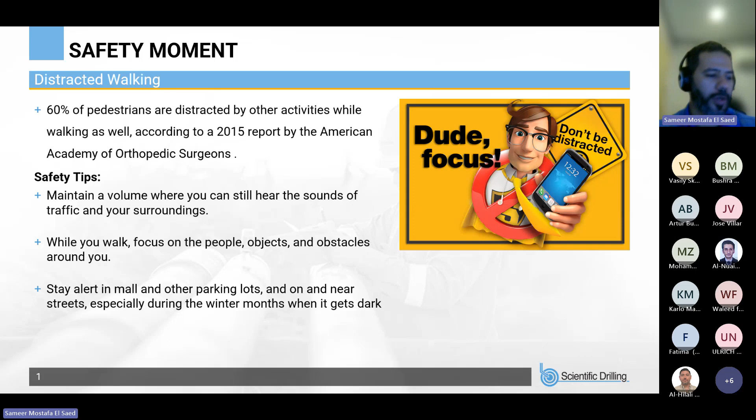So before we kick off, as a safety culture in SDI, we start every meeting with a safety moment. My safety moment today is about distracted walking. All of us are very connected to our phones. We keep looking at them when crossing roads, or going to grab something from our cars, and when we put on headsets, we don't pay enough attention to the surrounding environment, and there could be moving vehicles or objects that can cause serious injury. So my safety tip for today is to maintain a volume where you can hear the surroundings, and while walking, focus on the people and objects moving around you. Also stay alert in malls or parking lots or near streets, especially during winter months or when it gets dark. It's better to keep your phone in your pocket and pay attention to your surroundings when moving in the street. That's my safety moment for today.

For the agenda of the presentation, when Mr. Mazen invited me, I thought about what's unique that we can bring to the table in this technical discussion. We have a lot of good resources on LinkedIn or websites to read about cased hole logging, especially production logging. So I thought about what we have done differently in SDI to address some challenges.

So we have addressed three main challenges. One, slim MPLT deployment, because we have slim tools, as I will show you in the next slides. Two, we have logged very high flow rates, which other companies or service providers were not able to deploy their tools, and I will tell you the technical reason behind that. Third is the high temperature, high pressure challenges, like above 300-degree F. There is very limited technology in the market, and it becomes very challenging to log those wells.

So I'll give you a quick introduction. Why do we need this? Why are we speaking about this in this venue? Then we'll go to the MPLT challenges I have highlighted, and then to the solutions and the technology we can use. I left case studies at the end so we can compile what we discussed, and then a few slides about the background of the company I work for, and open discussion if anyone has a question.

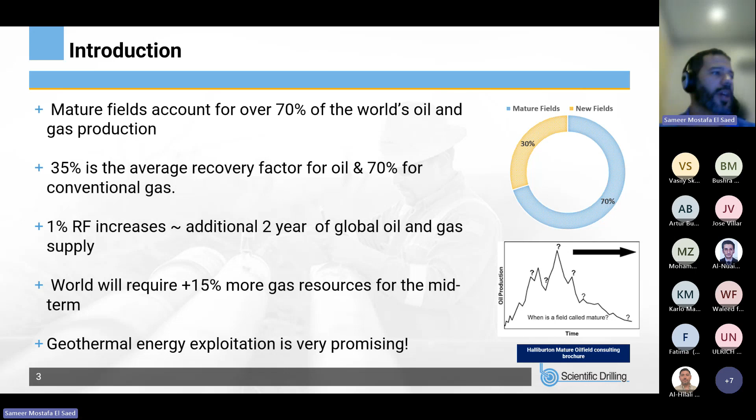Geothermal energy has become the star of renewable energy. The good thing for us as oil and gas people is that a lot of technologies from oil field services are being used for geothermal energy exploitation. I would say we at SDI run PLT and multi-finger caliper for geothermal producers on a daily basis in Asia Pacific. So the same tools we are going to present today, we are using them to log geothermal steam producers, running multi-finger caliper exactly as in any other oil and gas well. That's the good thing about having technology from oil and gas deployed and utilized in new energy fields like geothermal.

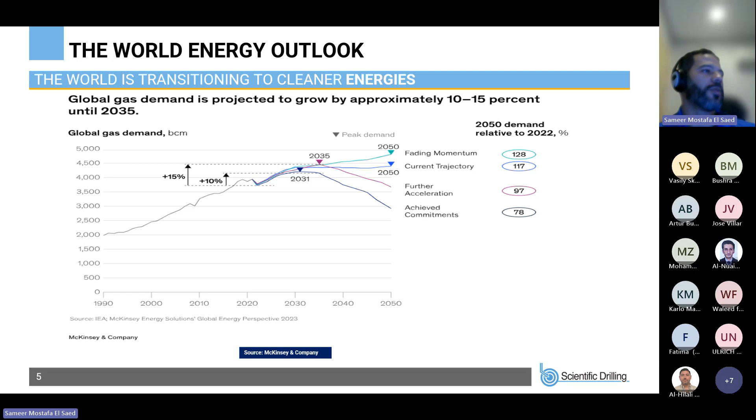As you can see in this graph from McKinsey and Company, for the midterm till 2035, gas demand is projected to grow by around 15%. As I mentioned, that puts responsibility on operators to start investing and drilling more gas wells. Why are we saying this here? Because it's related to the high temperature, high pressure challenge we're discussing for production logging. We just need to measure how much we are producing, and when those wells are high temp or ultra high temp, it becomes challenging to deploy the PLT on those wells.

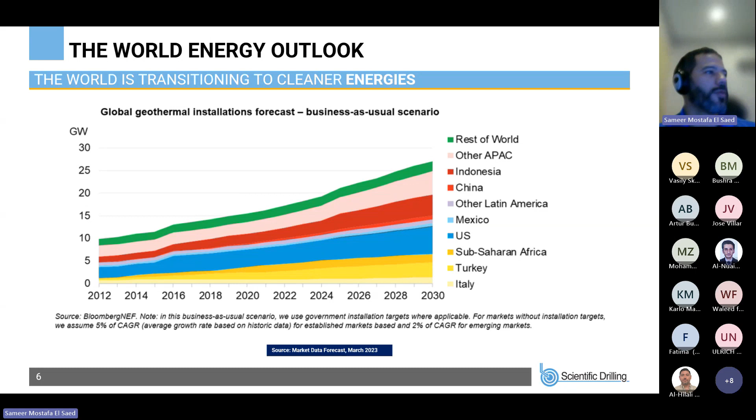Now let's go to the technical stuff. So production logging - just in case someone is not aware of this service - why do we run production logging?

We run production logging mainly to measure the downhole flow rates and compare that with the surface rates we are producing. The difference always reveals any mechanical problems in the well, either a leak, cross flow, thief zones, or whatever is related to mechanical well problems.

Running the PLT continuously will answer three main questions: What do we produce? Are we producing oil, are we producing water, and how much? How much is the water cut, how much oil are we producing? And where are we producing from - which zone, which reservoir zone are we producing from?

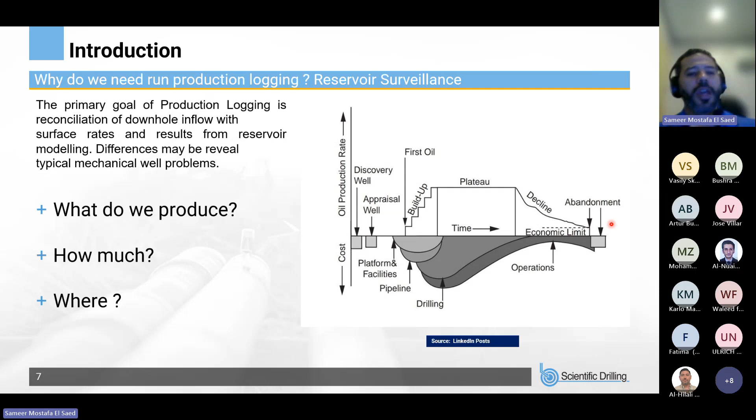So this is the importance of the PLT, but it's not always easy. There are challenges, as I've mentioned, and I'm going to highlight in this presentation how we can mitigate those challenges.

The first challenge in focus is the slim completion. As you probably know, in the mature field, the brown field we've just highlighted, the reservoir pressure will decrease, the support from the reservoir will start to decline, and the fluid velocity to lift the flow up to the surface will be reduced. So operators will decide either to use an artificial lift method - ESP, sucker rod pump, and so on - or use a smaller completion, one of which is the velocity string. It's a smaller completion that can increase the velocity of the fluid produced from the reservoir units to be lifted to the surface. Adding a velocity string becomes challenging for future well intervention like the PLT.

The second challenge is the higher flow rate. We have very good gas wells in the Middle East producing up to 130-150 million scf per day, and it makes it really difficult to deploy PLT or any BHA downhole. This difficulty comes from the lift force - when we try to push the tool downhole and the gas production is coming from down to up, it just pushes the tool to bounce, and then we need to pull out of hole. The usual mitigation for that is to add more weight bars - more sinker bars - and when adding more sinker bars to balance this force, you need to add more lubricator sections and bring a bigger crane for the rig-up operation, making it a very complex and heavy operation. The mitigation for that is to simply use a small cross-sectional slickline combined with the MPLT instead of a wireline PLT, and I will show you why this can impact the lift force resulting from the same flow rate.

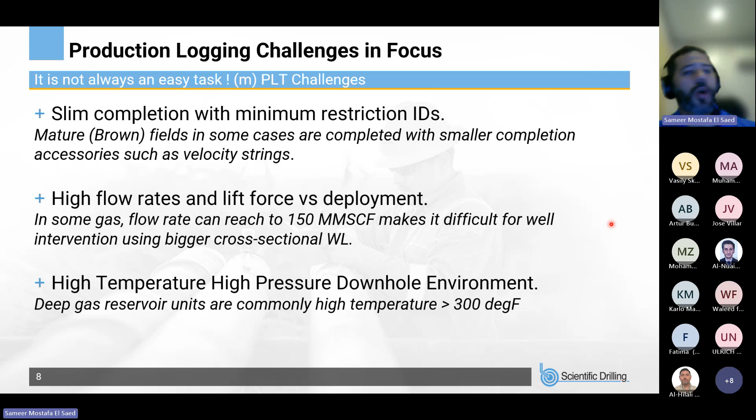So that becomes very challenging when we are running production logging on those wells. Those are the challenges that are in focus - how we can mitigate and address them with technology.

The first thing is the slim completion challenge. We can use a slim PLT string. What we use in SDI is a slim flow tool, which is 1.38, and we have logged some wells in the Middle East with minimum ID of 1.75 only, so we can deploy the tools easily on those completions, and the performance was very good.

This tool is modular based, so if you would like to make it shorter, we can just break it down. If you would like to deploy the spinner only, the gamma ray, pressure temperature spinner, gamma ray CCL spinner, we can plug and play whatever sensors we would like to be deployed on those wells.

It's slick line deployable, so the slick line is much more cost effective compared to wireline in terms of the unit and the number of people per crew that we need, and it becomes more encouraging to the operator to deploy a multi-well campaign compared to expensive wireline intervention.

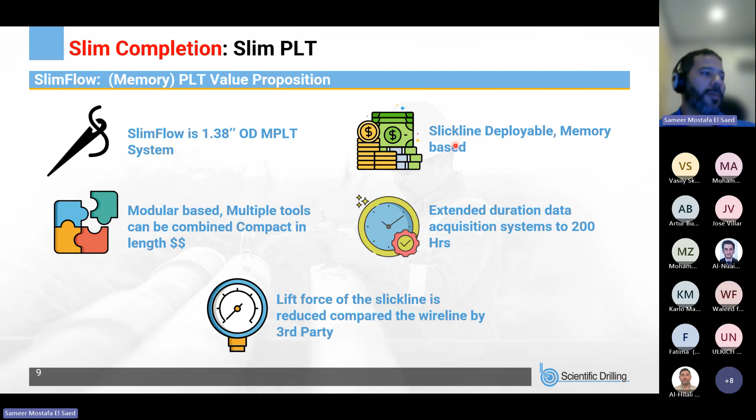Extended duration, that's probably addressing the high flow rate, and I will tell you why in the next few slides. The lift force - because we are using a slimmer tool that's memory based and a slick line, this tool can reduce the lift force by a third, at least 35%, for the same pressure or the same flow rate that we are anticipating.

We can customize these blades - I have a very good slide later on showing how we can customize these blades with different angles to optimize the response of the flow, whether we are looking at a low flow profile or a high flow profile. We can always customize and back engineer the spinners to be able to pick the readings for the wells we are logging.

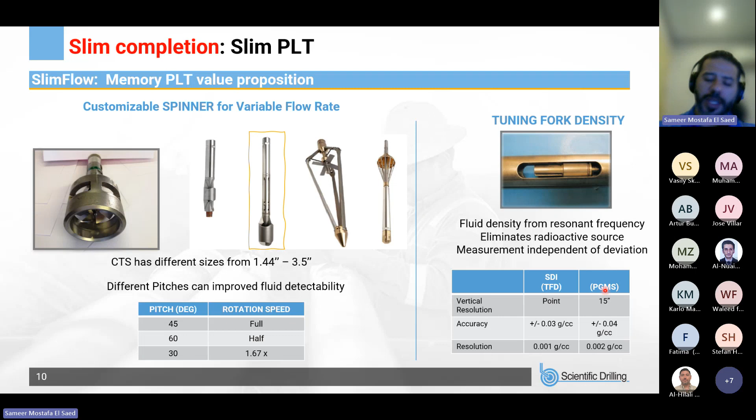The second challenge is the high flow rate. We have some giant gas fields in the Middle East, some of them in Qatar. Qatar has one of the biggest gas fields in the world, and I have seen also some onshore gas fields in Oman, where the production rate is extremely high, and we need to deploy PLT in those wells. It becomes really challenging in terms of rig up and from the operational perspective to deploy the PLT.

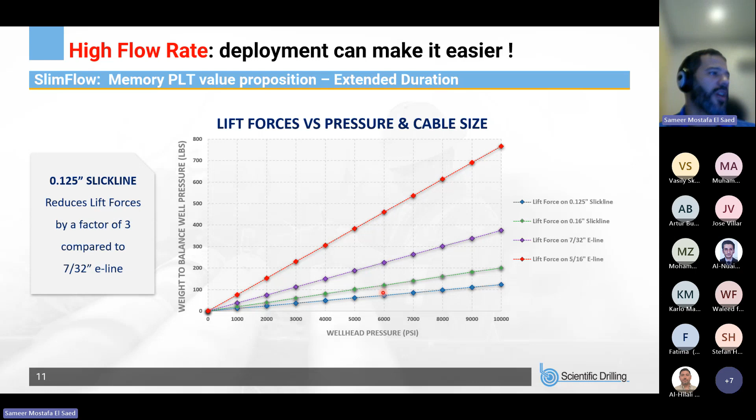So using a smaller cross-sectional area slick line, the conveyance can make it easier for operators who would like to run the PLT at a very high flow rate to do the nodal analysis of their field, and also derive the selective inflow performance.

So Sameer, what's the relationship between the high flow rate and the extended duration downhole? The high profile wells like this, which have a high production capacity, take a long time to stabilize between each condition. So if you start logging this well at maximum flow rate, and then shift to medium flow rate and minimum flow rate, the time to stabilize production between the maximum flow rate and the medium flow rate can reach up to 72 hours and even more.

So you would like to have a tool that can stay downhole to log the wells at a higher flow rate, up to 130 million SCF per day, and at the same time stay downhole for 72 hours of pressure buildup or stabilization time between each flow condition, then progressing with the second flow rate, third flow rate, and post shut-in.

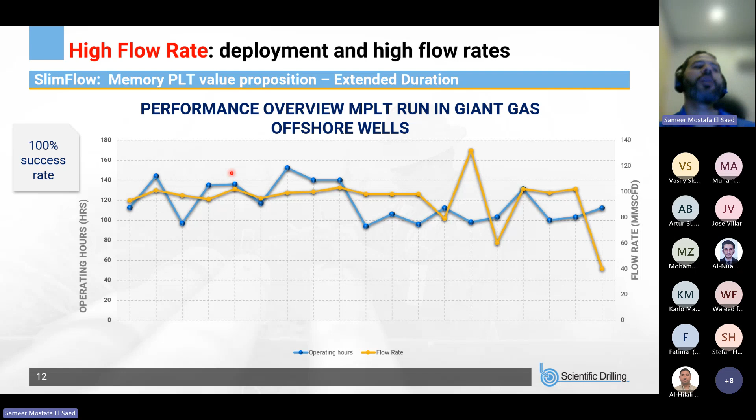The third challenge is the exciting one: high pressure, high temperature wells. So just a little bit of background on why we are having high temperature wells. Since this is the SPWLA chapter, I expect a lot of petrophysicists are joining us. It's all about the geothermal gradients and the downhole geological events that can increase the bottom hole temperature.

Basically, the more we drill, the more the bottom hole temperature will elevate, with a value of 2.92 degrees C per 100 meters. It means that if we drill to around 6,000 meters, we will be reaching 350 degree F. That's as a simple linear calculation.

So it means that with 6,000 meters, which is around 19,000 feet, which is becoming normal in the Middle East now, especially in Kuwait and Saudi Arabia, it becomes normal drilling, and we can see the bottom hole temperature exceeding 350, 360. But it's not always a linear relationship.

There are always downhole geologic events happening downhole that will increase or deviate from the linear relationship of the geothermal gradient, and we can see high temperature intervals just shallower than anticipated.

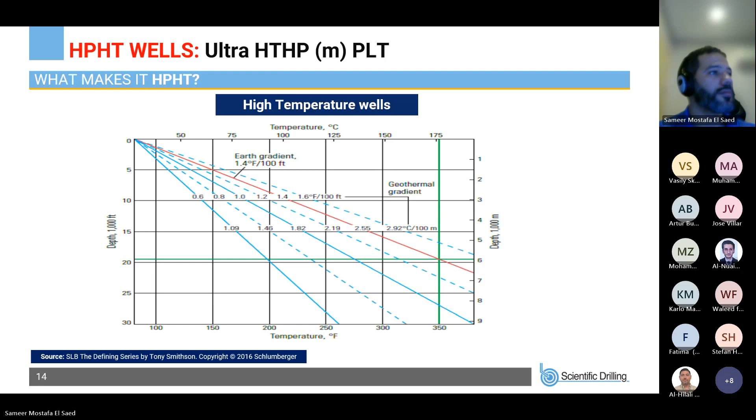Why am I saying this? Because there is a little bit of confusion in our industry about what is classified as high pressure, high temperature. There is the API classification, the American Petroleum Institute classification, and there is the Oil Field Services Technology Manufacturer classification. So you will see 'we have high temperature tools' - does it mean it operates above 350 or below 350?

So we have ultra high temp tools. What is this considered? It's above 400 or so.

So I thought to keep this slide as well. This is as per the API classification. This green square here represents the standard temperature envelope, right? It's below 300 degree F and 150 degree C. Anything above 300 degree F is considered to be high pressure, high temperature. Anything above 400 degree F is considered ultra high pressure temperature, and above 500 degree F is considered extreme high pressure, high temperature.

And I have seen that on geothermal wells and steam injection thermal EOR wells as well. Why are we saying this? Just to show you the size of the challenge, or the technology challenges that we are having.

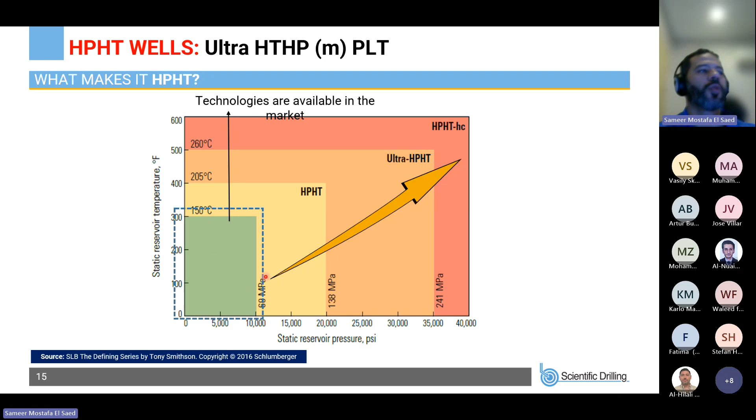In the green square, there are a lot of tools manufactured in the market. There are a lot of countries and companies manufacturing PLT tools, and they are available everywhere. Around 300 degree F, you will see probably 30 or 40 manufacturers of PLT tools in the market. But as we progress and increase the temperature above 300 degree F, it becomes limited technology offering, expensive material, critical operation, and fewer number of wells.

There was a very exciting statistic I saw from SLB, the defining series: back in 2013, out of 100,000 wells drilled that year, only 5% were high pressure, high temperature. This makes it not attractive for technology companies to manufacture high pressure, high temperature tools, because 95% of the wells are on the green square. So it's better for them to manufacture standard tools compared to high pressure, high temperature tools.

But I have seen over the past 2 years a paradigm shift, and a lot of big companies from the big three and big four start to invest money and effort to develop high pressure, high temperature downhole measurement tools like PLT, multi-finger caliper, and saturation tools, making them rated up to 400 degree F. SDI is one of those companies that has been pioneering the manufacturing and technology innovation in high pressure, high temperature downhole PLT measurement.

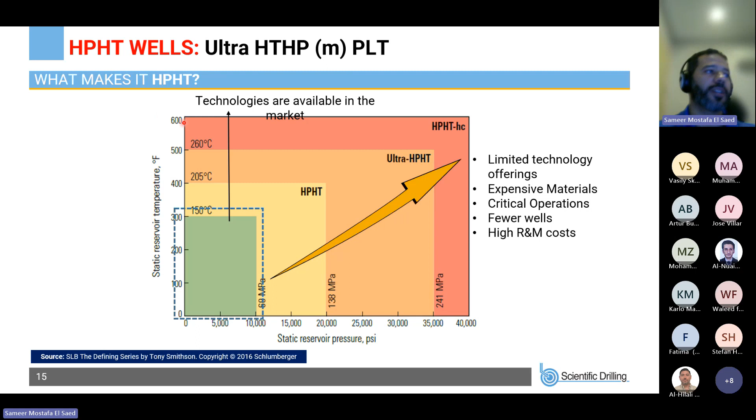This tool also comes in different sizes. 1.44 makes it one of the slimmest tools in the market. 1.44 is the operating diameter of the high temperature tools that we are using, and we have another bigger system at 1.75 and another at 2.25. Mainly, the main difference between these three systems is the flask size that we are using.

A little bit about the theory of why these tools are different from standard PLT tools. These tools have two main advantages. One, the materials we are using are very high graded material, rated up to extreme temperature conditions. Second is the heat shield, or the flask.

It's like the concept of the coffee mug. When you put coffee inside the mug, it reduces the heat transfer or heat conduction between the hot liquid inside the mug and the external temperature. What we do for this high temperature PLT is exactly the same, using heat shielded material, which we call the flask, to slow down the effect of the external temperature condition from the reservoir reaching the internal component of the tool.

But at the same time, the internal component of the tool is manufactured from high graded materials. That's why we can stay downhole in a high temperature condition like 500 degree F or 450 degree F for more than 12 or 14 hours to complete the PLT program that we are having. So this is the theory behind the high temperature production logging tool.

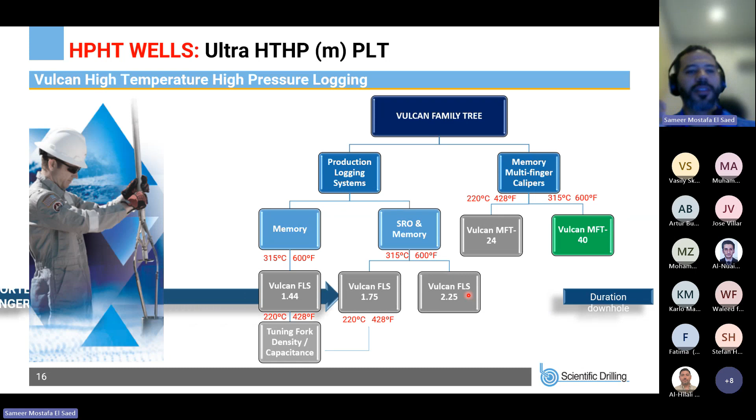It's all about the flask. You have a good flasking system, a good insulation system, you can stay downhole, and also make it smaller. Some other technology companies have the same flasking system, but it's bigger, because the component inside the tool and the flasking system makes it bigger. The underlying magic that we are having is to make it smaller, and also rated up to 600 degree F.

So we have progressed this not only for oil and gas, but also for geothermal. In case you are not aware of geothermal wells, we are tapping the hot spots downhole and either producing natural steam or injecting water from the same well and producing steam. So we would like to run the PLT in geothermal wells to measure the flow as well. We have used the advantage of the tools that we are having and upgraded them to be rated to 650 degree F, and we can run it for 10 hours in geothermal wells.

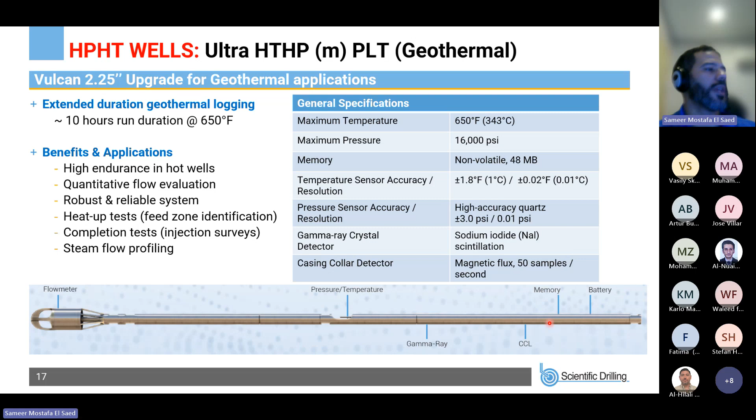This is the strength of the tool. We have the flow meter, as mentioned. This is CTS, and the good thing about CTS, which I forgot to mention, is that you can remove this crossover and deploy another tool. So you have a bigger spinner, it's not inline, and you can deploy multiple spinners on this string. We have the pressure temperature here, the gamma ray CCL for correlation, the memory, and the battery. So we can deploy it by Slickline to collect data about the flow profile in geothermal wells as well.

So that's just to give you some insight about how extreme the temperature can go. In Asia, for example, we have been logging thousands of wells, thousands of runs, with a high success rate, either geothermal logging or gas wells, in Gulf of Thailand, the Philippines, Vietnam, Japan, either geothermal producers or other wells. We have in the Middle East a lot of high temperature fields in Oman, Saudi Arabia, UAE, and it's growing. I can tell you that I get requests on a monthly basis from new operators saying, yes, we need to have that high temperature tool to be able to deploy it downhole.

So this graph between the temperature and the pressure just shows you how things can go beyond the standard pressure and standard temperature around the globe.

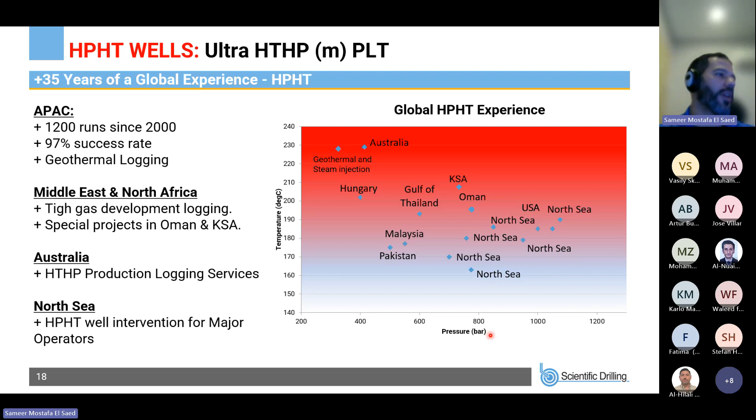Case studies. So I'll start with this one.

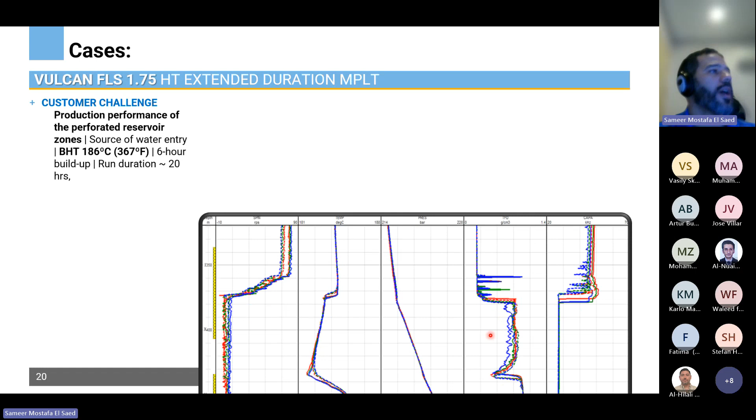In this case, we have a gas producer that has a source of water, and the bottom hole temperature is 186 degrees C. We are required to stay downhole for 6 hours for a pressure buildup, and the entire run duration is 20 hours. So this is the challenge that we have.

Just in case you are not aware of the PLT logs, let me walk you through this. The first track is the perforation zones. We have 2 zones here, 1 and 2. The second track is the spinner, as you can see here. This track is the temperature in degrees C, scale from 181 to 188 - very high temperature. Then we have the pressure curve, the acoustic density, and the capacitance sensor.

So we can see here that the spinner is responding to that. Most of the production is coming from this interval. However, we have some heating anomaly here that's not pronounced by the spinner.

So it means that there is a sort of flow or activity behind the casing here that the spinner cannot see. This is probably related to behind-casing channeling or cross flow and so on.

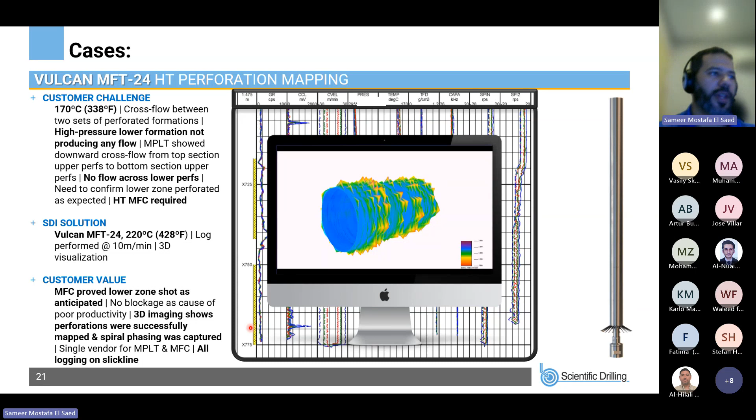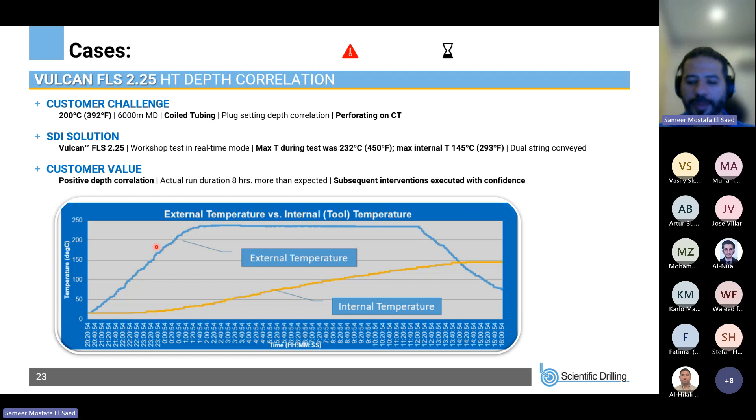I'm done with my technical part. I just kept two slides here with a little bit of background about SDI.

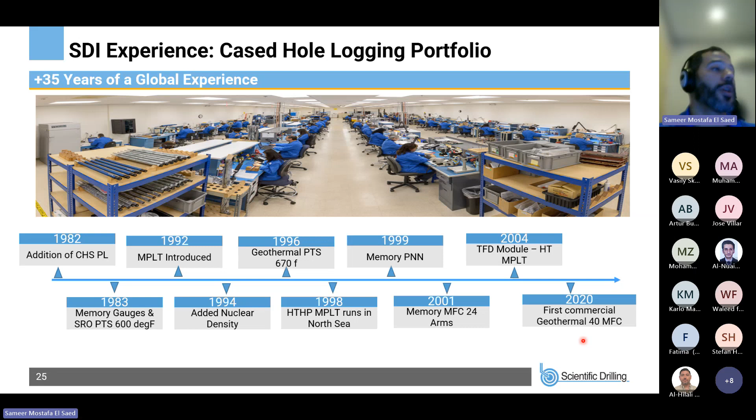We've been offering cased hole services since 1982. We were able to develop one of the first high temperature memory gauges back in 1983, rated up to 600 degrees F. We kept developing our ultra high temperature capability since then until we introduced the first commercial geothermal multi-finger caliper, 40 arm, used extensively in the geothermal market. We keep developing and researching how to make it more reliable and extend the time downhole when using our high temperature, high pressure PLT.

We have worked with multiple operators around the world, and this has given us a lot of learning lessons that I've shared with you today, and there are many more. It's good to be in the oilfield service part because it gives a really good chance to be exposed to multiple scenarios and operation requirements that we need to address and mitigate.

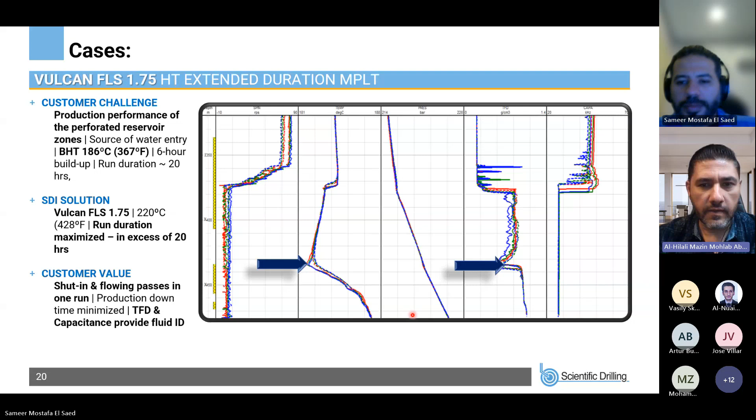If you go to the next slide, I believe this is a flowing condition, but the shutdown you are referring to wasn't presented here. No, actually this is the shutting condition, if I'm not mistaken, because here we always measure the cross flow in the shut-in condition. I know, I understand this one, I think this is it.

But because if this one is in shutting condition, that means the zone above the perf will be parallel at 0. You can see it is shifted to the right side toward the 20. It will be in a similar way to the deepest zone, it will be shifted to the right side, and the cross flow will be tight in the middle. It will go parallel to 0, go to the right side, then parallel to 0, left side parallel to 0 again.

Unless it's producing to the surface, I don't know, unless it's producing something and the well is shutting and the cross flow is upward somewhere.

We relied on the temperature data to assume this cross flow. The temperature curve clearly shows that, and we also have the spinner response from spinner 1 and spinner 2. So it's either production from the lower perf, because it might be different layers with different pressures. It's not a very homogeneous reservoir unit. So probably there is differential pressure from this unit to other units, and the fluid is going from one unit and being produced by another. This is the whole point of the cross flow.

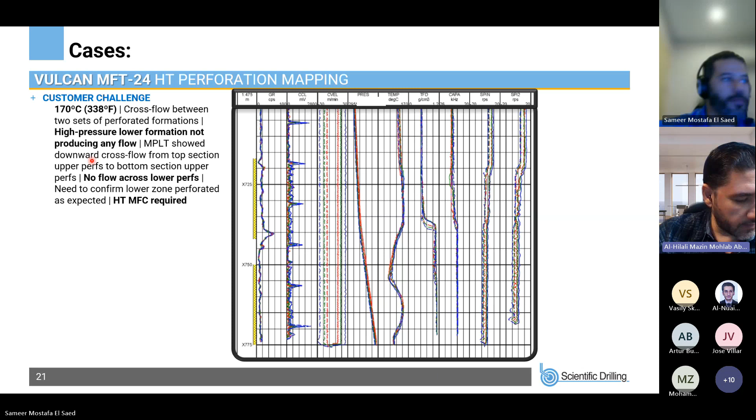Okay, no problem. And for the third case, just a question - I believe spinner number 3 has the best, or the lowest threshold, if I'm not wrong, just as the outcome of this test. You figure out number 3 because SP3 is giving a very high response in revolutions per second.

Yeah, I believe it's a very light spinner. It's also the difference in the impeller - this is helical and this is a paddle impeller, this is 30 degree, so it has a different configuration. That's why we tried multiple spinners to choose which one has the best response. It looks like the middle tool and the upper tool have excellent response in the gas, so we normalized that in our operation. So the objective of this case is to deploy 3 different spinners with 3 different configurations to capture which one has the best response in this condition.